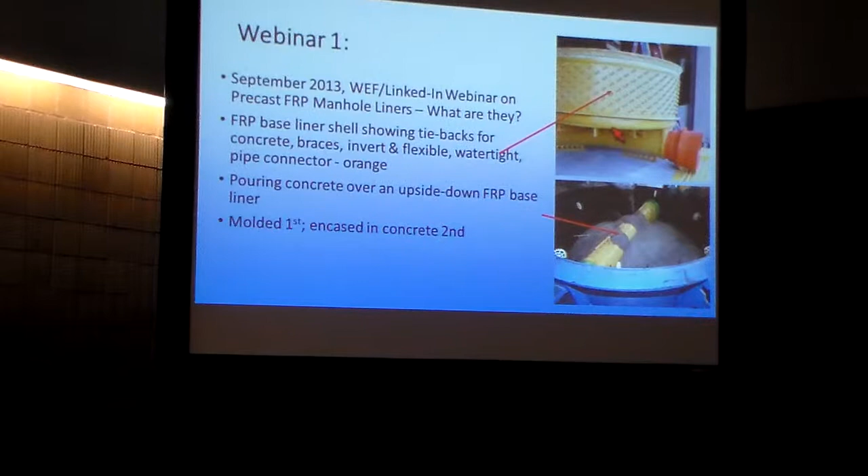Got to know this company in a webinar. I don't know if you folks go out and look at the WEF webinars, but this is how I got introduced to what these folks do. September 2013, a WEF LinkedIn webinar, precast fiberglass reinforced plastic manhole liners.

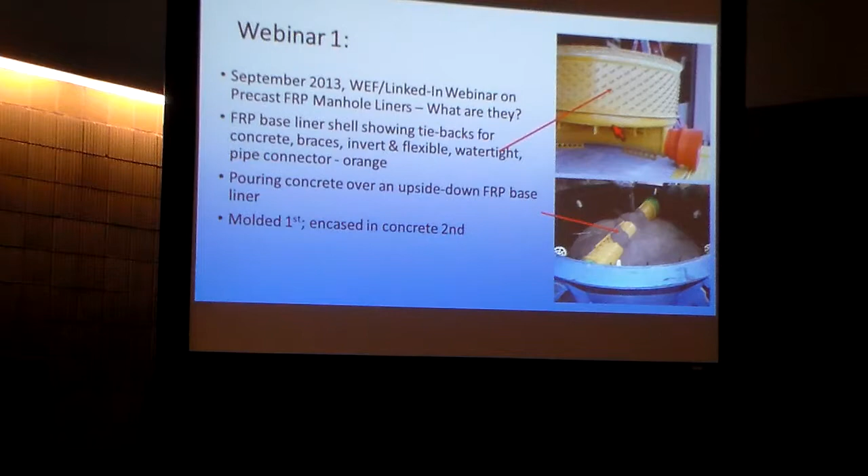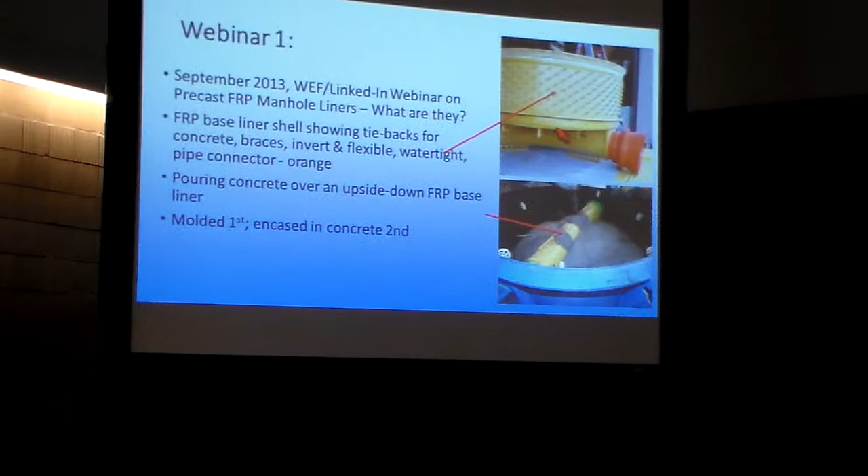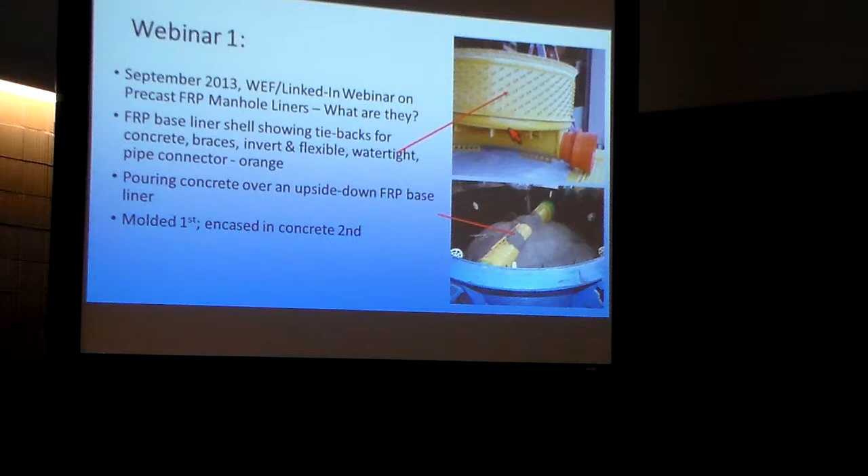Well, what are they? It turns out the top picture on the right-hand side shows a manhole base liner, and it shows the tiebacks into which the concrete sinks when you flip it over, as shown on the bottom, and pour in the concrete, perhaps any rebar that you need in order to make it a full-size, high-strength concrete manhole base. And then when you flip it back over, what the sewer sees is the fiberglass reinforced plastic, which is impervious to corrosion, impervious to water, and it's actually pretty slippery, so it cuts down the amount of maintenance you need in each manhole. So first step is to get the molding. Second step is to get the thing encased in concrete.

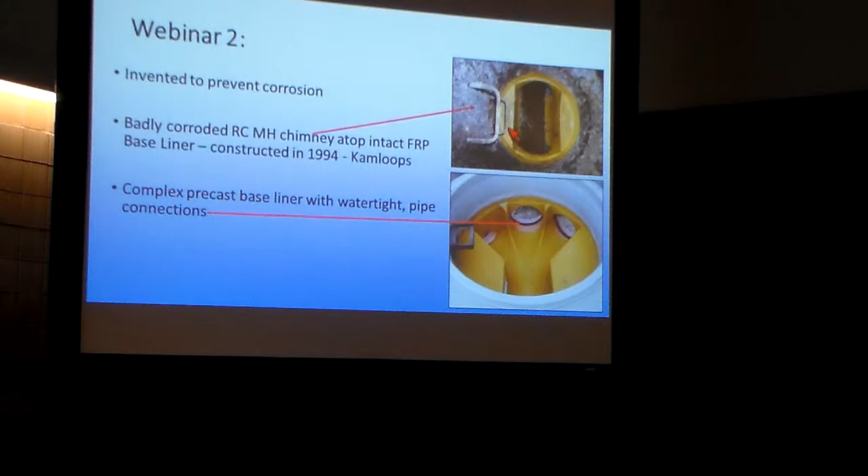Second thing we learned is that it was invented to prevent corrosion initially. The top right picture shows a badly corroded manhole chimney atop a fiberglass reinforced plastic base liner. The base liner is intact. Constructed in 1994, so it's only been about 20 years since the sewer went in the ground and the top of the manhole is already corroded. Bottom picture shows a complex precast liner, watertight pipe connections. Those are all pressure fittings that allow some play in the pipe as well. The idea, when you put together a system like this, is to keep all the water out everywhere, including the annular spaces around the pipes.

Fourth picture, completely lined, new golden fiberglass reinforced plastic manhole, including polypropylene steps that are protected, bench treads. You have great visibility, it's corrosion resistant, non-clogging, reduces maintenance. And when I drop my tools, and I drop my tools a lot when I go in manholes, I don't know what it is about them. In these manholes, you can see the pliers at the bottom of the flow, and you can pick them up. You don't have to fish around for them so much.

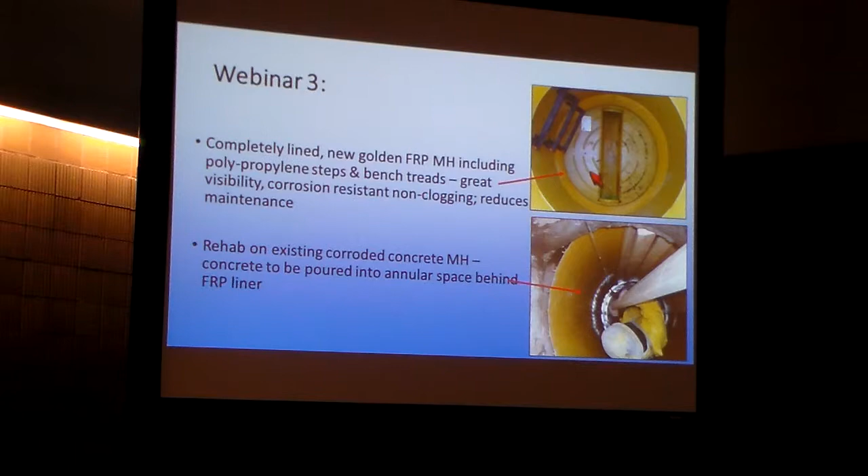Rehab, the last picture, bottom right, shows rehab on an existing manhole where the concrete has been scarified, liner's been placed in the manhole, it's braced toward the outside, and you have to pour concrete into the annular space behind the FRP liner. Characteristics of the liners: invented in Germany about 1975 to prevent corrosion. They're 3 millimeters thick. 2 millimeters have been tried a couple of times. They had a couple of cracks and failures, went to 3, and it's been fine since then for the most part. We'll get into that.

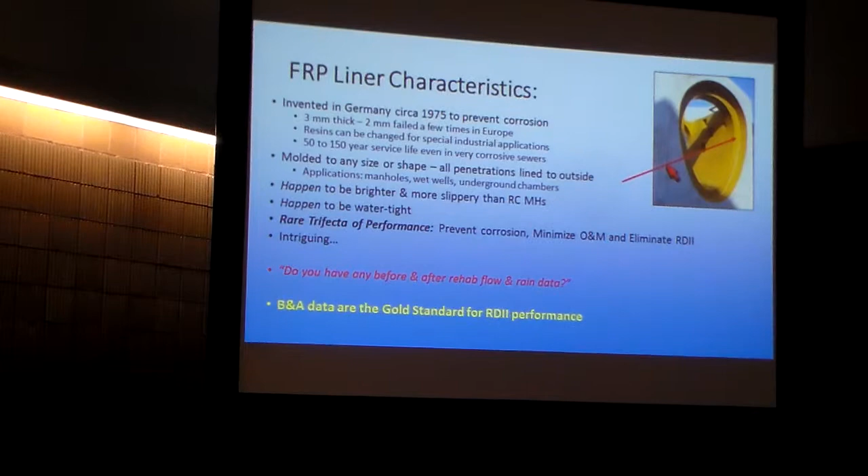They happen to be brighter and more slippery than reinforced concrete manholes. That's a little bit of a side benefit. They also happen to be watertight, which has been my business for the last 38 years, and that was interesting to me. Sort of hit the rare trifecta of performance. They prevent corrosion, they minimize O&M, and they also eliminate I&I. I was intrigued.

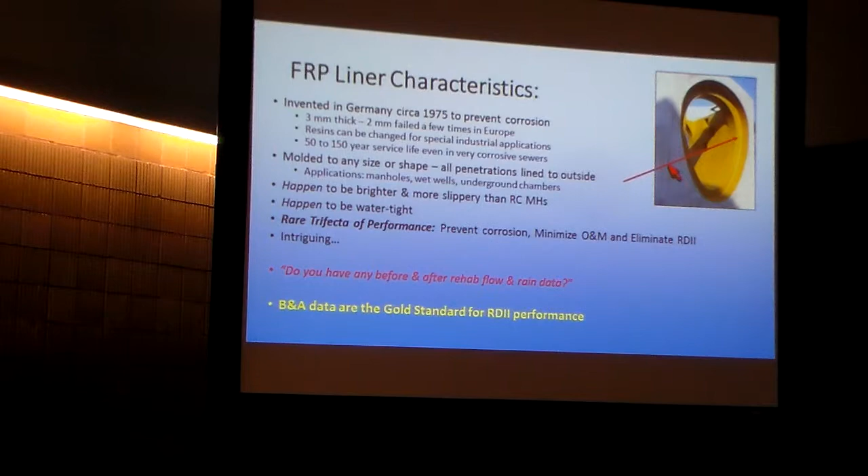So I asked my acid question that I always ask: do you have any before and after rainfall and flow data? Before and after data are the gold standard to tell whether or not your I&I was actually reduced or not. Your before data can be taken in a wet season, your after data can be taken in a dry season, and even though you didn't move 1 gallon of I&I, it'll look like it had a 50% reduction because the rainfall wasn't accounted for.

So, the search for data is centered on Pierce County, Washington. Pierce County stretches from Puget Sound in the city of Tacoma out to Mount Rainier in the Cascades to the east. The county had the largest installed system of fiberglass reinforced plastic manholes with 11,000 baseliners installed. Of the 11,000 baseliners, 6 have failed over the years, cracked. That's a 99.95% intact installation.

All 6 can be repaired in the field. 4 of the 6 were cracked because unauthorized people cored through the manhole and cracked the FRP plastic on their way in with the core. We'd like to train folks to core properly so that that doesn't happen. In this case, 6 out of 11,000 manholes got past somebody.

Originally specified in 1989, to reduce O&M, it turns out that Pierce County had many, many corroded reinforced concrete manhole channels that had to be broken out and rechanneled because they were causing lots of debris clogging. Robin Ordonez, sitting over next to the microphone there, said there's got to be something else. Some guy walked in with these fiberglass liners and he said, why don't we try those? They tried those in 1989. They've been specified by brand ever since because they worked.

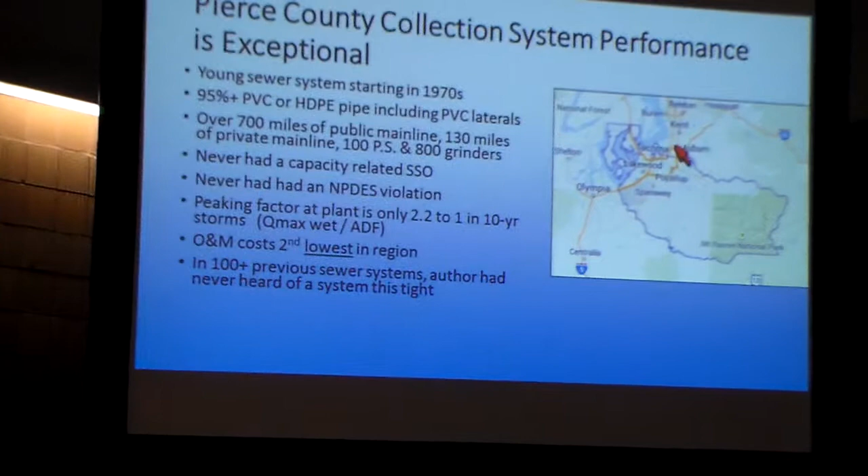Pierce County collection system performance is quite exceptional. I've done this over 100 times and I've never seen one like this. It's a young sewer system, a big advantage in being young. Starting in the 1970s, very quickly after the new guys got in, they said they want to get rid of the reinforced concrete and vitrified clay pipe that was in the system. Today, 95% of the system is PVC or HDPE pipe, including the laterals, which are mostly PVC.

It's not a small system. It's 800 miles total, 700 miles of public main line, 130 of private main line. That means maintained by somebody else other than Pierce County in this case. There's 100 pump stations and 800 grinder pumps specifically around lakes. This system has never had a capacity-related SSO. The system had never had an NPDES violation of any kind.

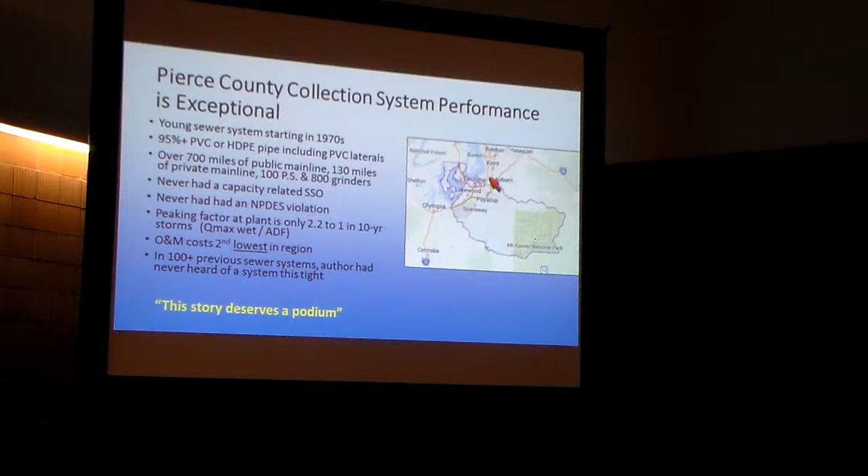The peaking factor at the treatment plant during a 10-year storm was 2.2 to 1. That's Qmax over average daily flow. O&M costs also happen to be the second lowest in the region. In 100 sewer systems that I've evaluated, I've never seen anything quite like that. The typical peaking factors that I see are 8 to 1, 12 to 1, 30 to 1, stuff like that during heavy rainstorms. So the first thing I said, boy, this story deserves a podium. We need to know how people did it right. And the second thing I said, can we find any support data to actually tell what happened?

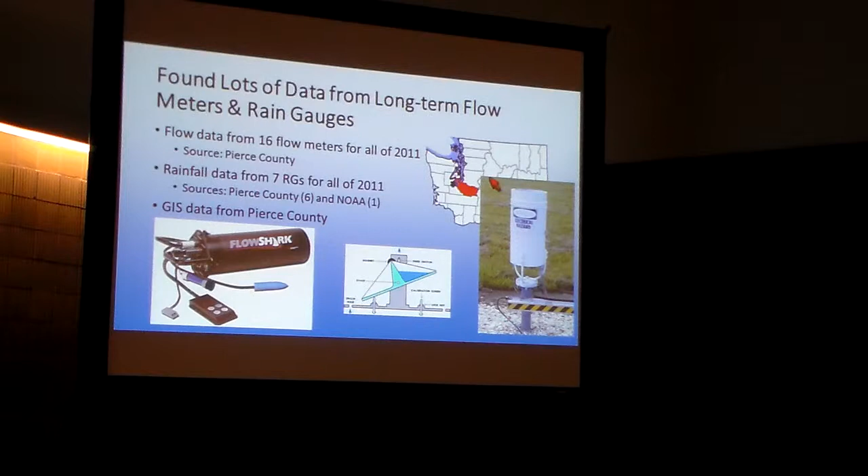Well, it turns out Pierce County did have a lot of data. We found flow data from 16 flow meters, and they gave us data for the entire year of 2011. Found data from 7 rain gauges, 6 of them from Pierce County, 1 from NOAA. And what we got here is a picture on the bottom right-hand side of a rain gauge. Center in the bottom is a tipping bucket. I know a lot of you folks know how a tipping bucket rain gauge measures. It's down to the hundredths of an inch. And the data was 5-minute data, which is very good. And the flow monitoring data were also 5-minute data. So we had something to really sink our teeth into and do some evaluation.

We cranked the GIS and flow data, rainfall data through some really fast RDII engines. GIS, rain, flow, all dumped into an online program called Slicer. We're able to do scattergraph evaluations to tell whether or not there are any blockages in the sewers right out of the raw flow data, capacity evaluations to see whether or not they could pass 2-year, 5-year, 10-year, 100-year storms using all the flow data plus the output from Slicer.

Calculations and graphics were all dumped into a master template, and then the master template was merged to a template flow report. And this whole thing took only 80 hours to process. Did 23 site years of data, 288 basin storms, and wrote the 133-page report. Database and template to do this are available. See me afterwards if you want to talk about it. Kip Julian from Pierce County processed all the GIS data, and that was not trivial.

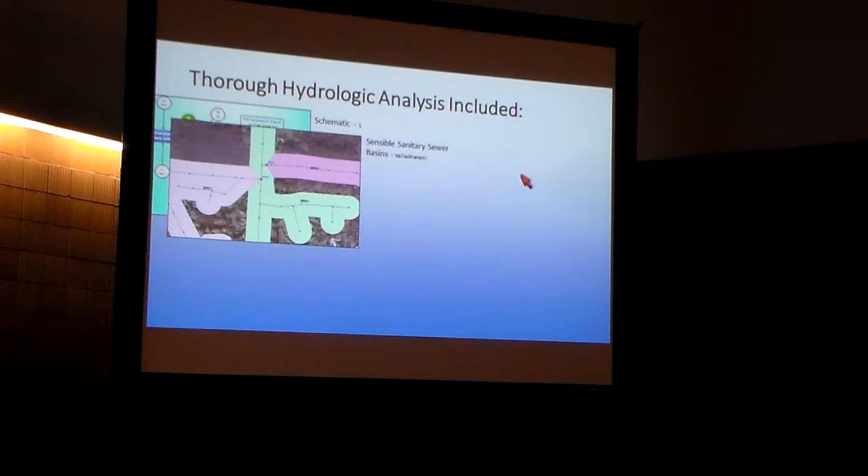Any place where you think, in your experience as an engineer, you're likely to have connected to the sanitary sewers, that's what this is all about. Srini Vallabhaneni, one of the guys from the collection systems here at WEF, came up with this concept in the SSOAP toolbox. I think it's a great idea, and there are two great advantages: one, you can use this data to predict rehabilitation success, and I think our next author is going to talk about that. Two is you can compare System A with System B with System C in all parts of the country and all over the world.

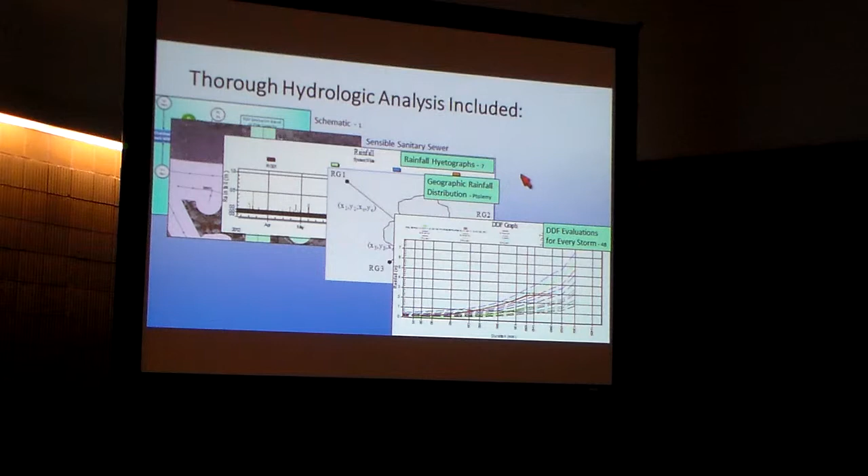The third thing we did is had rainfall hyetographs, one for each rain gauge. We had geographic rainfall distribution. The math for this came from Claudius Ptolemy in a book stored at the Library at Alexandria in Egypt in 430 AD. I want you to know we're bringing you the most up-to-date information we can. Fifth thing that we did was depth, duration, frequency graphs on every single storm. We were able to tell you whether or not it was a 2-month, 3-month, 4, 6, 9-month, 1-year, 2-year, 5-year, up to 100-year storm. You need to know what kind of storm drove your problems. Otherwise, it's like driving a car without a tachometer. You never know how fast the engine is going.

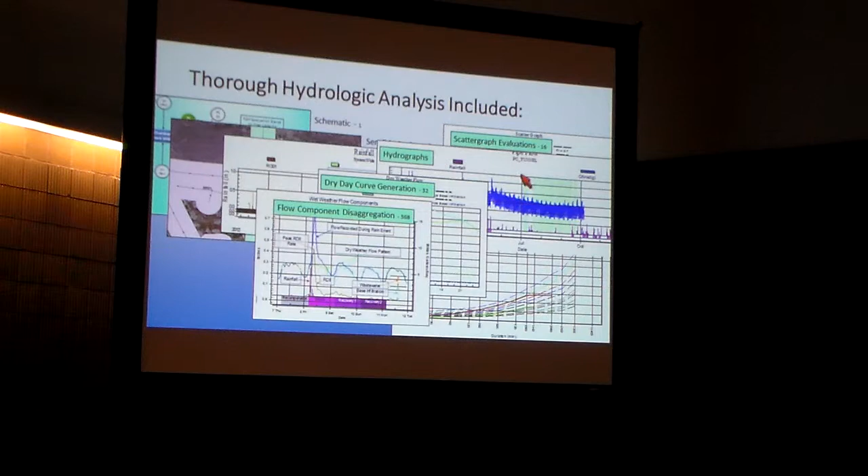And so we needed to get peak rates and total volumes. And in order to do that calculation really fast, this all happens inside Slice. We have periods: a pre-condensation period down on the x-axis, a storm period, recovery period 1, recovery period 2. Those recovery periods are where you're going to see most of the infiltration. You think you're going to see most of the inflow during the RDII, but I always say that inflow and infiltration are largely mixed, and you can't tell until you do your SSES work which is really which. Sometimes 90% of your inflow is really infiltration. The last thing we did was flow projections, which is what you need to do to get out to the capacity evaluations of the site.

Results from the RDII evaluation showed that Pierce County really did have very little RDII. Excessive RDII shown on the top line would have been shown in red on this chart, with more than 10% rainfall ingress getting into the sewers. There was none. Over 5% RDII, possibly excessive RDII. There was none of that in any of the basins. I've never seen one like this. Every single site could pass a 10-year storm without overflowing. Many of them could pass a 100-year storm without overflowing. No relief sewers were needed for SSO reduction, and therefore there was little or no economic incentive to proceed with any SSES work, smoke testing, CCTV, etc.

All 16 basins were non-excessive for RDII with less than 5%. The top right basin, PC01 at 4.5%, the one below that 3%, down to the bottom where we had basins that showed no RDII at all. The Comprehensive Rehab Prediction Tool, we'll tell you about that, shows that likely RDII removals from comprehensive rehab in any of these basins is equal to 0. You could go out there and line everything and get 0 gallons out. Learn more in the next paper.

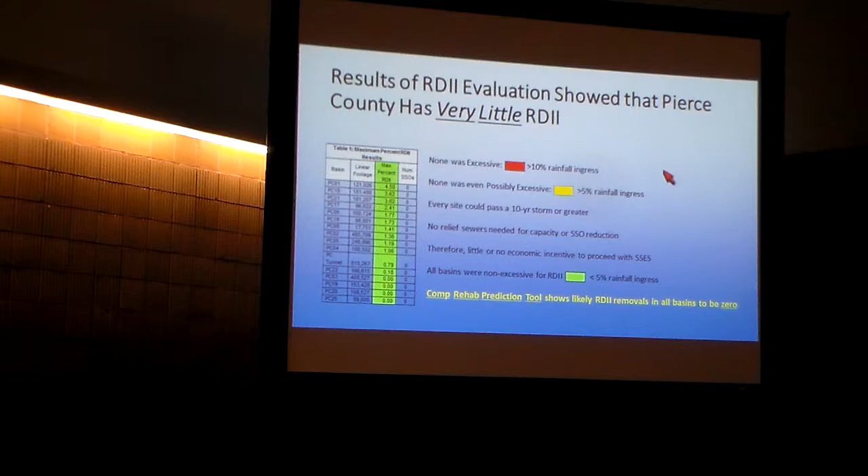The decision matrix included maximum percent rainfall results. We've just gone through them. We also took a look at base infiltration because that's what the regulators always wanted to see. And according to EPA guidelines, PC19 shows up as having excessive RDII because there was 3,760 gallons per day per inch mile, and EPA drew a line in the sand at 3,000. So, is it really excessive? Well, with the rehab unlikely to eliminate any measurable RDII in that system, and the measurable RDII shown at 0, what do you think?

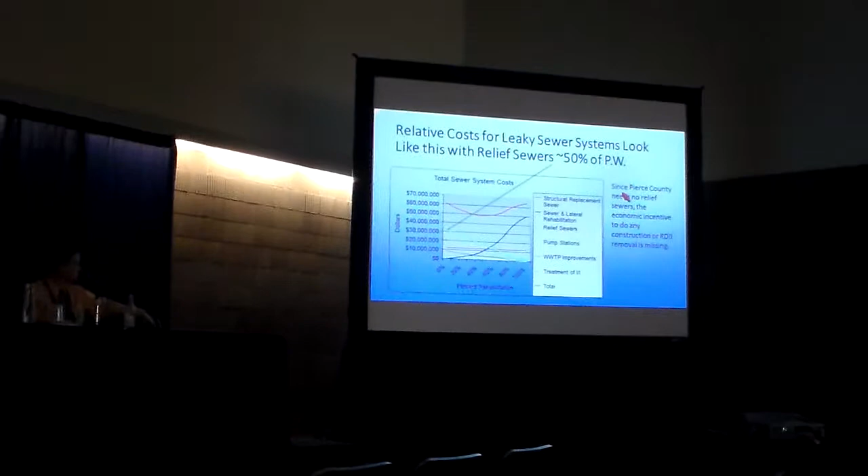Relative costs in a leaky sewer, unlike Pierce County, usually have about 50% of the present worth needed to upgrade the system in relief sewers. And in this case, this system, $30 million of relief sewers were needed if no rehab were done. Total cost for doing everything in the system, including sewer lateral rehab, pump stations, wastewater treatment plant improvements, would have been about $60 million. So relief sewers tend to be, in most cases in a leaky system, your largest driver for whether or not you're going to go ahead and do rehab and SSES work. Since Pierce County needed no relief sewers, the incentive was not there.

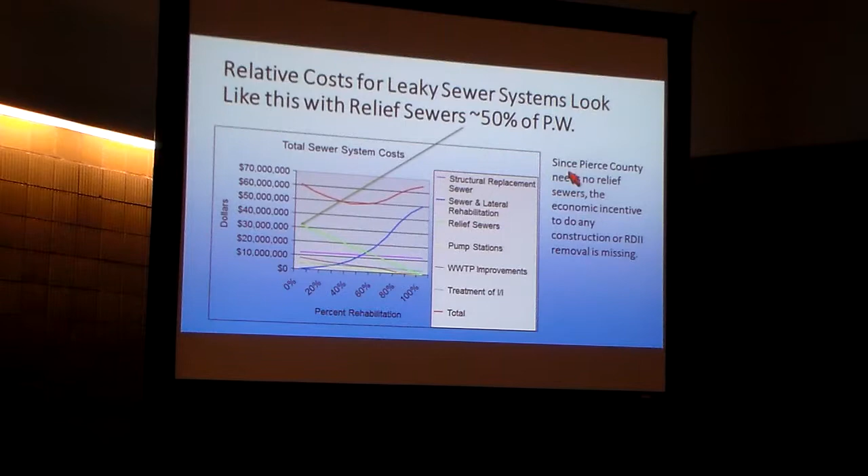Now here we're able to compare Pierce County to the results in other sewer systems, and this is one of the advantages of the metric we used. What we found was Pierce County had 71% lower maximum RDII than the next tightest sewer system that I've ever seen. And that is an anomaly of the very first magnitude. I've never, ever seen anything this tight. If you want to know how to do things right, you should talk to the Pierce County folks.

I had data from Westlake, Ohio, Shelton, Connecticut, Coplay Whitehall, Pennsylvania, all very well-run sewer systems. And the Pierce County data was 70% drier than the next best one, and 80, 100, 150% drier than some of the others. So I encourage you to take a look at the Pierce County specs. You're going to have the URL on several of the following slides.

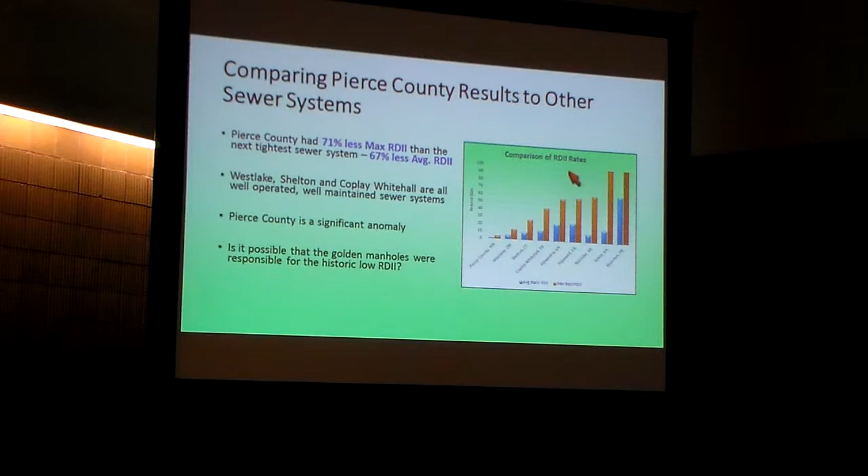So here's the question. Is it possible that the golden manholes were responsible for the historic low I&I? That's the question that we needed to answer. In order to do this, we had to figure out how much of the system is really affected by those manholes. So we invented a new metric for manholes, vertical inch miles, as opposed to the inch miles that you usually see in a collection system. 1 mile of 8-inch diameter pipe is a footprint of 8 inch miles. 2 miles of 8-inch pipe is a footprint of 16 inch miles.

Here's a factoid. It's an area. An inch mile equals 440 square feet. Or if you're Canadian or European, 1 centimeter kilometer equals 10 square meters. A 48-inch manhole comprises about 0.1 vertical inch miles. So it works out that 10 to 20% of each basin in Pierce County was comprised of manholes. Even less, perhaps 3% of the system, has been lined with those baseliners.

With all else being equal, the manholes should contribute only 10 to 20% of the I&I, but all else is not necessarily equal. If all sewers are tight, all the remaining leaks could be in the manholes, but every manhole also has a 24-inch diameter opening at the top that, under the right conditions, can ship millions of gallons a day into the sewers. 15% of the system was manholes, 71% lower RDII. We figured there were some other factors in play, and there were.

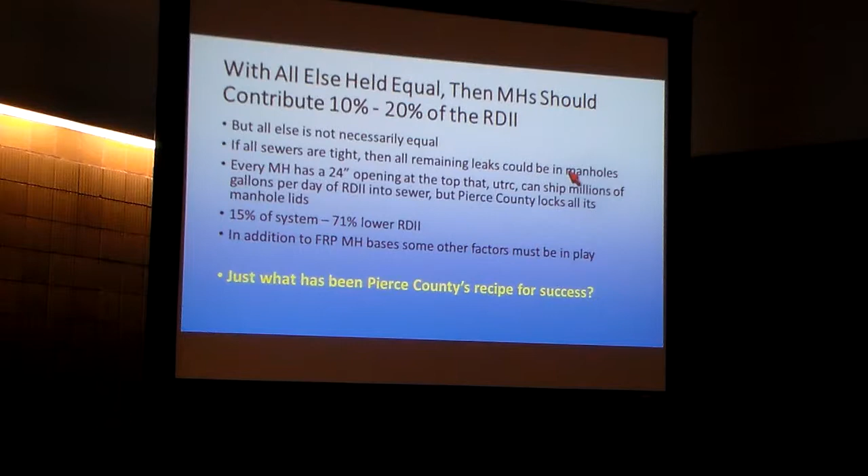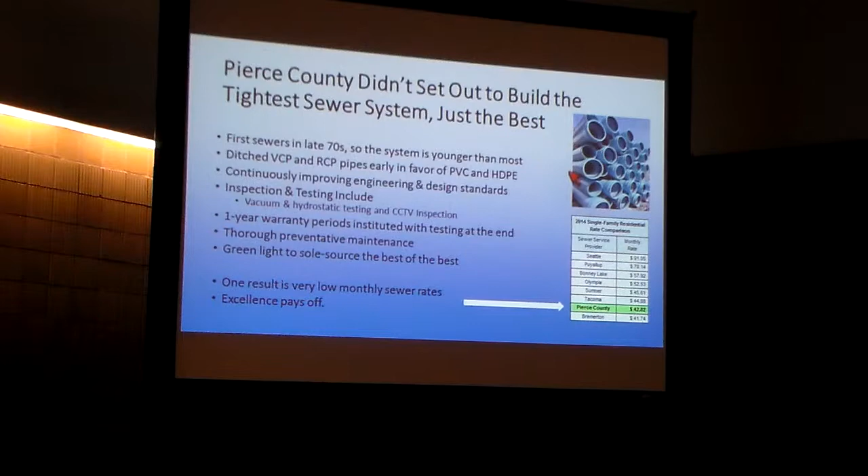Just what has been Pierce County's recipe for success? They didn't start out to build the tightest sewer system, just the best. First sewers went in in the late 70s. We've talked about ditching the brittle VCP and RCP pipes. That helped a ton. They're continuously improving their engineering design standards. Inspection and testing include vacuum and hydrostatic testing and CCTV inspection. They require a 1-year warranty on all new construction with testing at the end, and the contractor doesn't get paid the retainer till the end.

There's a thorough preventive maintenance program, and there's a green light to sole source the best of the best if needed. One result of this sort of program is that they have very low monthly sewer rates. Building the best sewer system, Pierce County ends up with the second lowest sewer rates in the general area. So excellence apparently pays off.

High quality has been a product of a government that has worked very well. All 6 sections get together in bi-weekly meetings. They have been cultivating a culture of cooperation, and that has avoided fiefdoms that we see in a lot of other municipalities. All staff impacted by capital projects are included in design review and construct